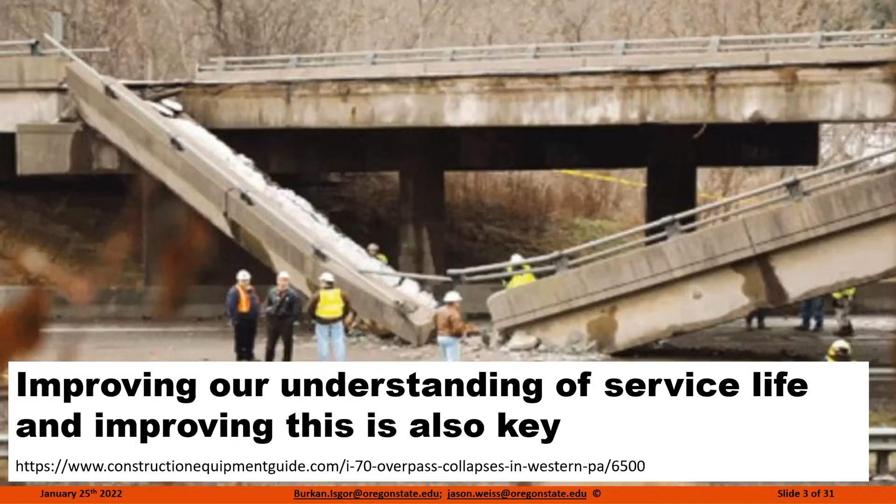So what we're really trying to do here is couple these two concepts together, and bring this to say the time for change is now, in how we're really adopting this or looking at these systems. We really need to look at this as we go here.

We really want to look at our sustainability, but there are really going to be 3 areas we focus on. The first is we have a lot of mixtures where we can reduce the cement content. We can optimize these systems. We can take out a lot of binder in these systems, and we can make them much more sustainable just by optimizing the systems we're looking at.

And I think we know this when we start to look at mixtures that have way too much powder, way too much cement in the system. The second thing we're going to talk a lot about is how we can look at the carbon footprint, and really this cradle to gate phase, by reducing the clinker factors in our concrete. There's a lot of alternative SCMs and a lot of innovative ways we can go about looking at this.

We've got some cellulose additives that we've got a big test site coming up with that allow us to reduce the clinker and get the same overall performance. But in addition, we can actually start to talk about the carbon footprint, where we're looking at cradle to grave phases.

We start to bring in that permeability, the freeze-thaw, and the overall performance criteria for the concrete systems we're looking at. We start to bring in the service life. So what I want to do is really talk about how we're using modeling that's trying to tie these three aspects together as we move this forward.

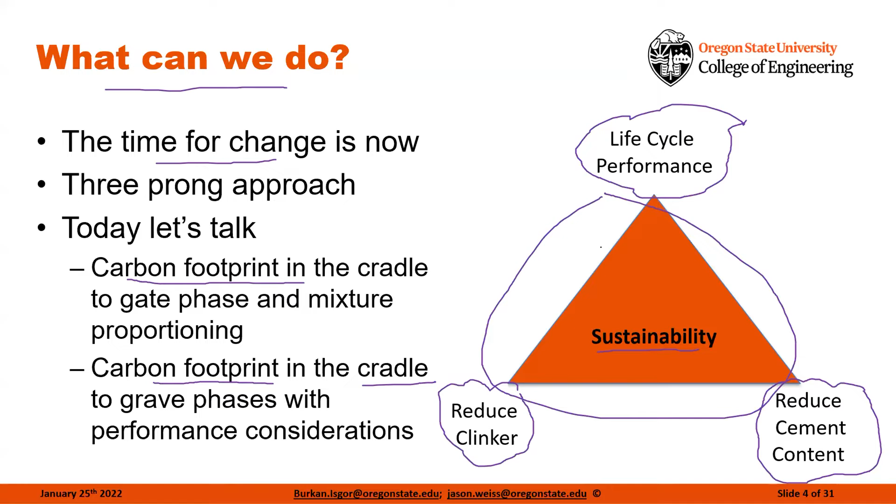When we start to talk about modeling, a lot of times people get nervous and say, why are we using a computer model, or why are we using these other things? I want to point out that there have been models used in concrete for well over a century. We know mathematical models have existed.

We can go back to Feret's model, where he described a model that said we could relate the strength of our concrete to volumes of things like air, water, and cement. We know this became the model of Abrams' water to cement ratio law, which is actually at the heart of a lot of what we do in our codes.

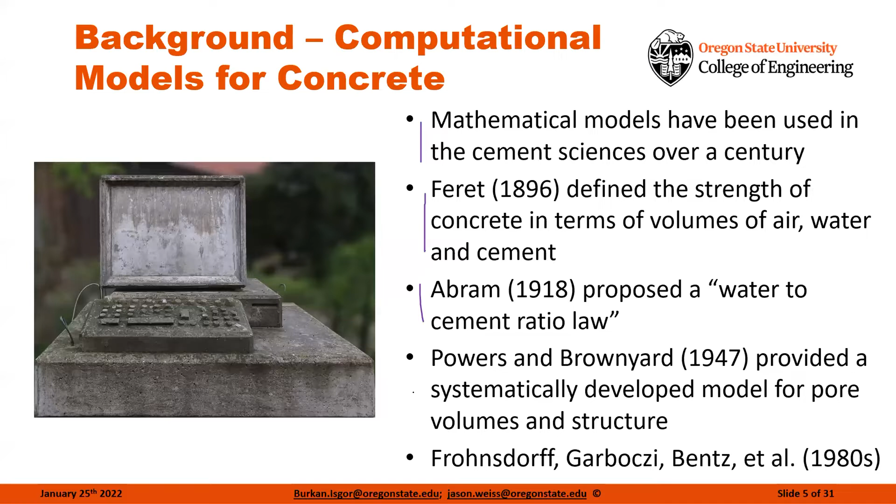Powers and Brownyard, we're going to actually talk about their work, but they were using model systems to describe performance. This has amplified over the years, and we can see this in the NIST model, in the μic model from Switzerland, and a lot of different models that have come along.

What we're doing is essentially saying we're going to utilize some of the concepts in these models so that we can take some of the foundational principles and predict the reactions between cement and supplemental cementitious materials. What we're going to do here that's a little bit unique compared to what we've done historically is we're going to consider the constituent material chemistry and the reaction products, the pore solution and the pore spaces in these calculations.

So for each system we're simulating, we're doing this for the specific materials being tested, for the specific cement being tested, for the specific SCM source being tested. One of the real values we have in this is we've been able to build up a database where we can place all North American cements, and all the fly ash sources being used, so we can now start to simulate a wide range of the materials being used.

The work is largely divided into two parts: a part where we talk about the equilibrium reactions, which is our classic thermodynamics and Gibbs energy minimization, and then we're also going to bring kinetics into the discussion so we can talk about the speed and rate of the reactions. This becomes a very important part of this.

What's crucial in this is that it extends a lot of the work being done in thermodynamics to both concrete, but also to service life modeling and some of the service life modeling concepts.

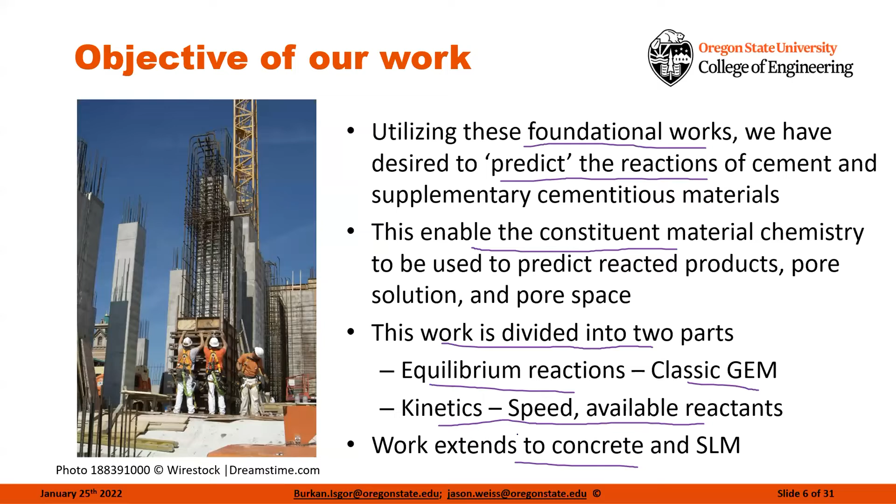So if we take a second and think about this, what we really want to try to do when we're thermodynamically modeling these systems is we start off with our water, we start off with our cement and our cement chemistry, and we bring those together with the volumes of the materials, and we use some of these modeling predictions.

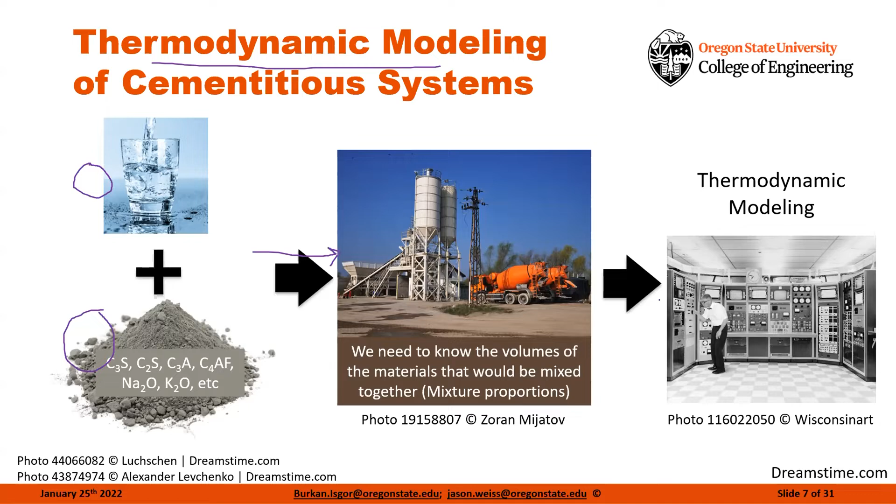Now, what the thermodynamic software is going to be doing in this, or Gibbs energy minimization, is it's going to say, if I start off with a known set of materials, my known cements shown here in the reds and grayish colors, and I start off with water, I can now start to figure out what reactions would form as these materials are enabled to react or come to a state of equilibrium.

And you can think of this a little bit like having a puzzle, a box with all the puzzle pieces in it. So we're starting out with the puzzle pieces, and what we're doing is asking the question, what's the best way to fit all these pieces together? How do we get all the pieces together so that we can get to the lowest energy state? This allows us to determine the reaction products that are forming.

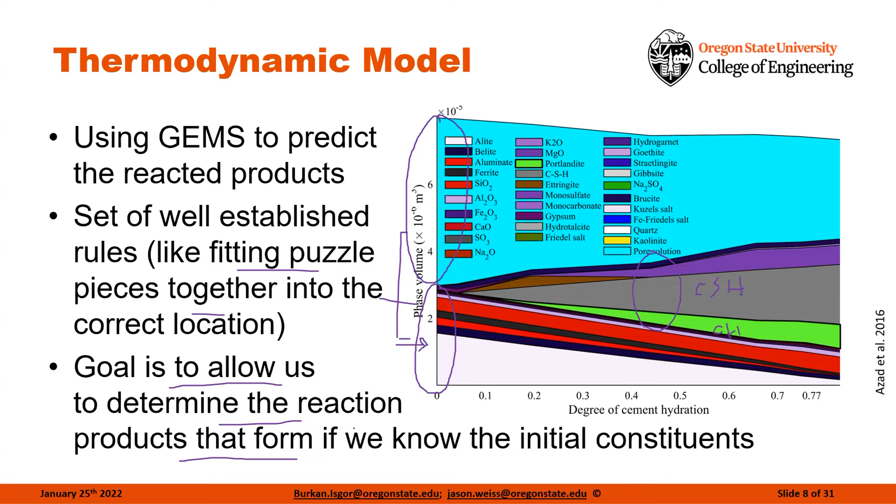We're doing this based on the initial constituents that we have that are unique. So if you have a particular fly ash, a particular ponded ash, a particular specific type of material, we can bring that into the discussion as one of the initial puzzle pieces we're dealing with. Over time, the cement and SCMs are going to react with the water and form phases we know, whether it's calcium silicate hydrate, shown here in gray, or calcium hydroxide, shown here in green. We can calculate how these are going to be produced over time.

The way this is done is through an algorithm inside the program where essentially you take the initial constituents and the water, put those together, and look at all the different reactions that can form from the thermodynamic database. You can pick the lowest energy state, which is essentially saying this is how all those puzzle pieces fit together best. In doing that, we can say these are going to be the reaction products that we get.

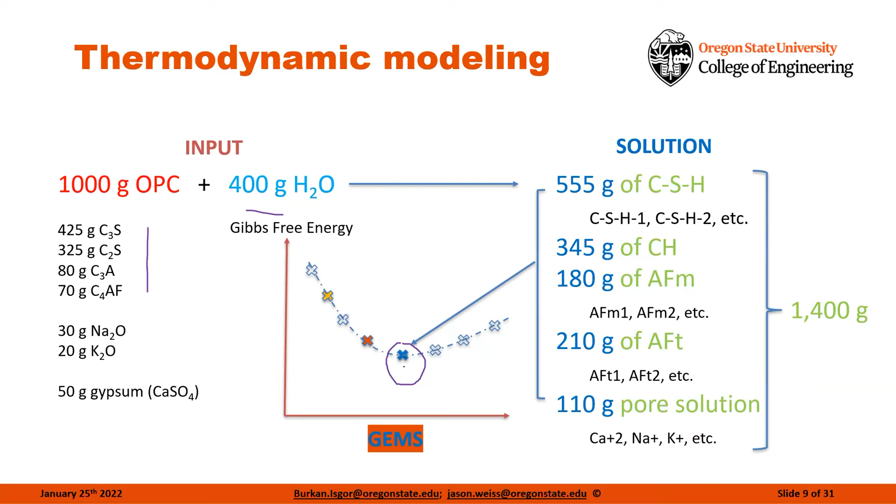Once we have those reaction products, we need to scale that up into what this looks like in terms of the structure of the overall material. So here we're going to start to describe the porosity of the system, because once we take those reaction products and the porosity of the system, we can describe strength, transport, and all these other properties.

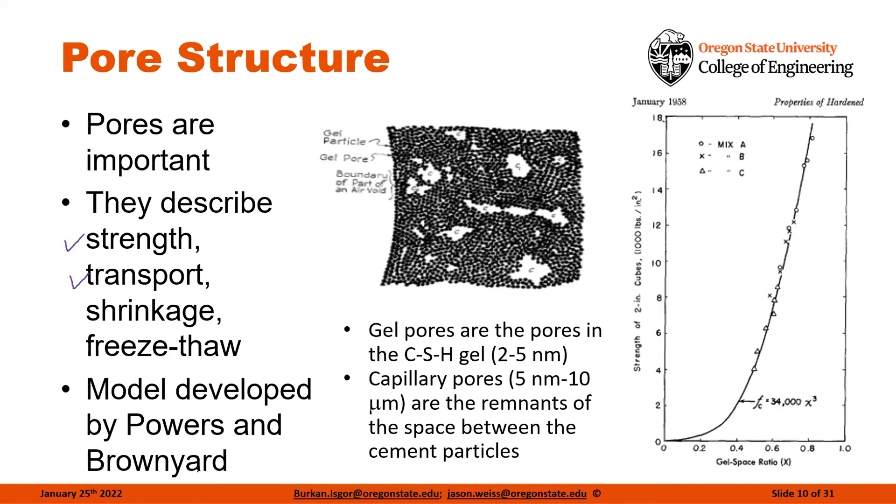This is really the heart of what Powers and Brownyard did, and this is essentially the extension of what we're doing with the thermodynamic modeling. What we're able to do here is apply a model called the pore partitioning model. We take the outputs of the thermodynamic model, where we have the initial cement phases or SCM phases going into the system, and our initial water, and we're able to compute the reacted products.

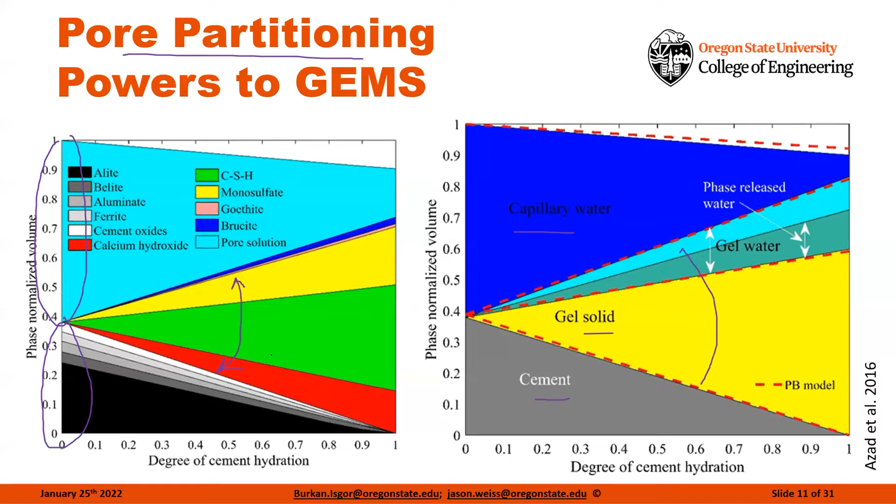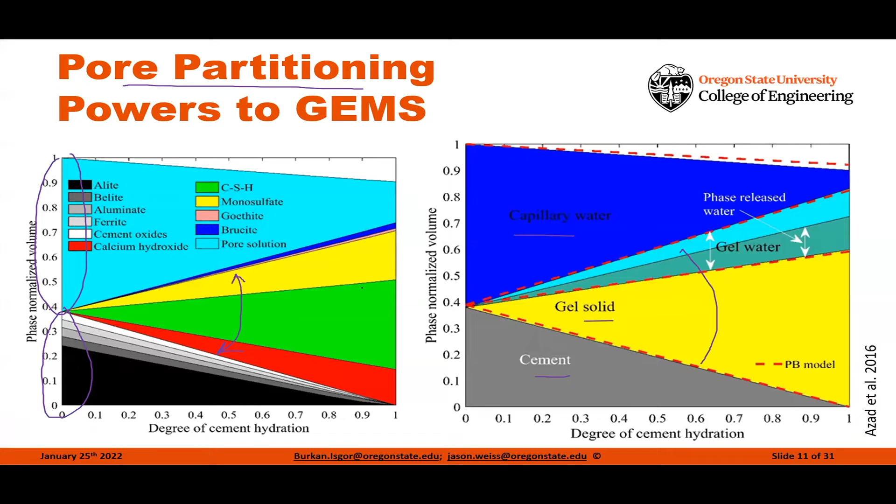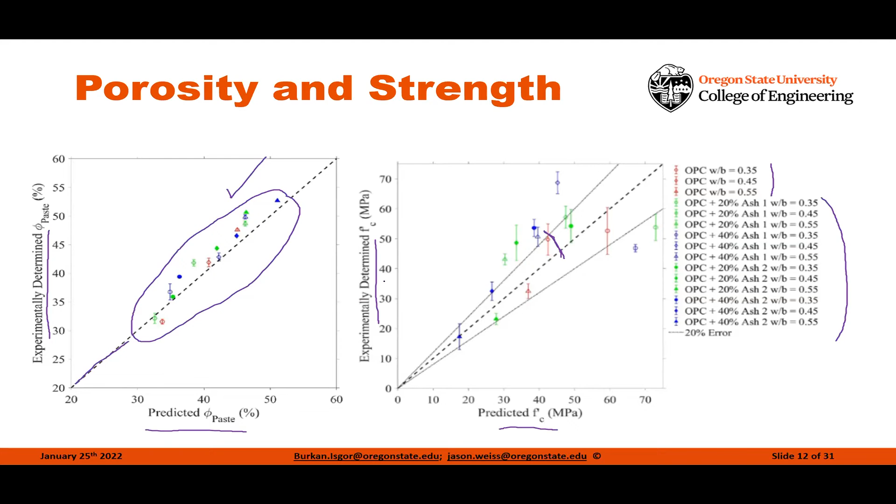In addition, we've used this to describe for a lot of groups how we can make the transition from an ASTM C150 cement over to an ASTM C595, or Portland limestone cement, in the system. We've been able to build on a lot of the work out there, showing how the porosity of the system starts to change, and it's changing because of some of the phases forming in the system.

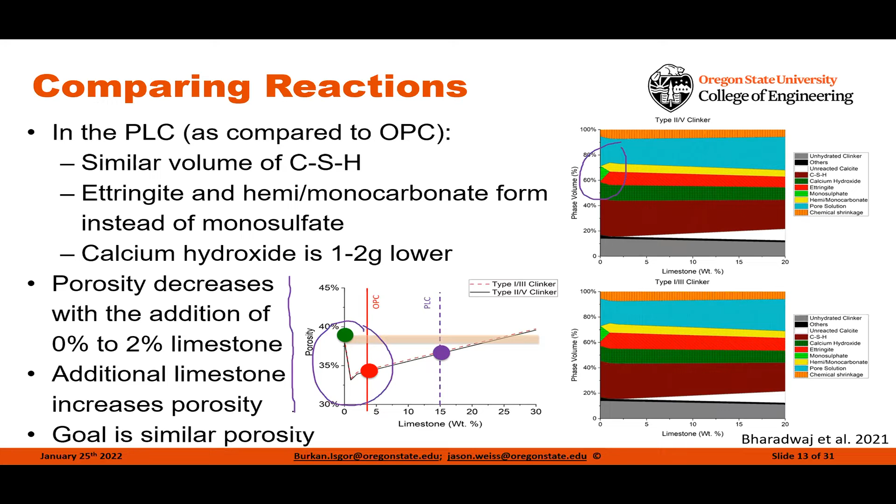We're starting to replace some of the monosulfate with things like ettringite, monocarbonate, or hemicarbonate, and we're able to describe the reductions in porosity occurring in those systems. That reduction in porosity translates into a change in strength or a change in transport properties. This has been very useful in explaining to people what's happening in these PLC systems.

One of the frequently asked questions we've gotten talking with state highway agencies and other groups is: if I use a Portland limestone cement, does that mean I need to stop using SCMs? The simple and most direct answer is no. Keep using your SCMs if you're using a Portland limestone cement. You're going to get a 10 to 12% reduction in carbon simply by shifting from an ASTM C150 cement over to a 595 cement. Right now we believe 49 out of 50 states permit the use of a C595 cement, and we're seeing a lot of transition to this.

What we can say is, if your SCMs are silica based, you're essentially going to see the same type of performance. However, if your SCMs have alumina in them, especially as we increase the amount of reactive alumina in these systems, we see a further decrease in porosity and further stabilization of those phases. That reduction in porosity gets us back to similar performance as we started with, and we're able to go to a much higher limestone content in those systems. This is along the lines of what Karen was talking about earlier with the LC3 cements.

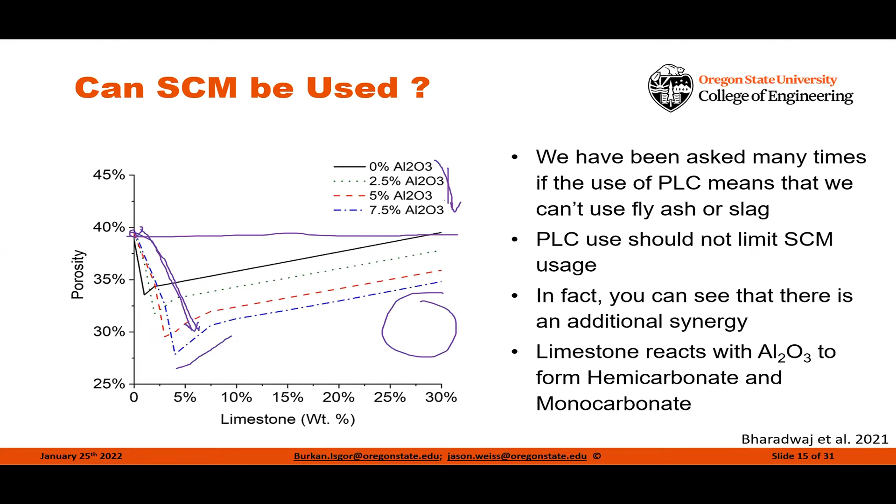So again, just to drive this point home: if you're using a C595 cement or using limestone in the system, it's beneficial to use that with your SCMs, and that's really what we want to be doing as we move this forward. The other thing I want to mention quickly, because this has come up and we've been looking at it quite a bit with these modeling approaches...

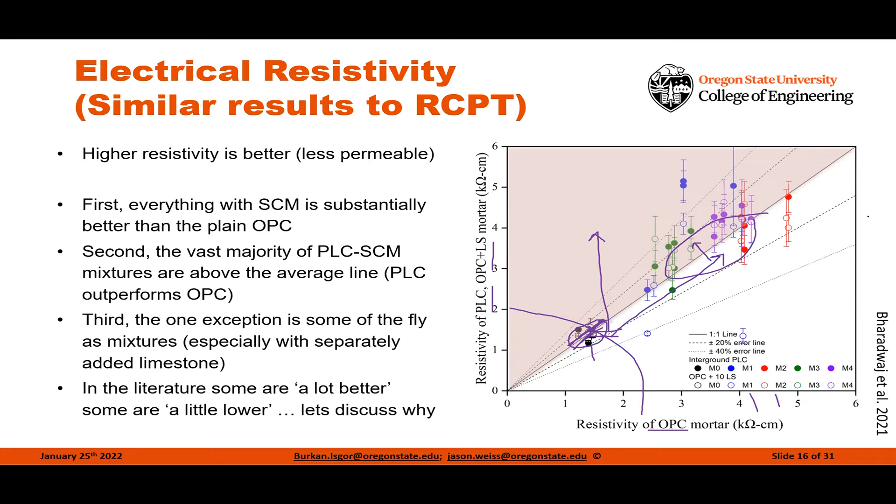So we're actually seeing a huge benefit in terms of transport, a huge benefit in terms of service life, simply because we're using the SCMs and because we're using the SCMs with limestone in the system.

So how do we start to integrate this and bring it all together? The modeling approach we're using is we can take the chemistry of the OPC and bring that into the picture. We have a pretty robust database where we've got all the North American cements we could find placed in the database with that information.

We can actually add limestone into the system if we want. But now we can also add supplementary cementitious materials - this could be fly ash, slag, ground up shells, all sorts of other materials. As long as we know the chemical composition of the SCM and how much of that material is going to react, this simulation can be performed.

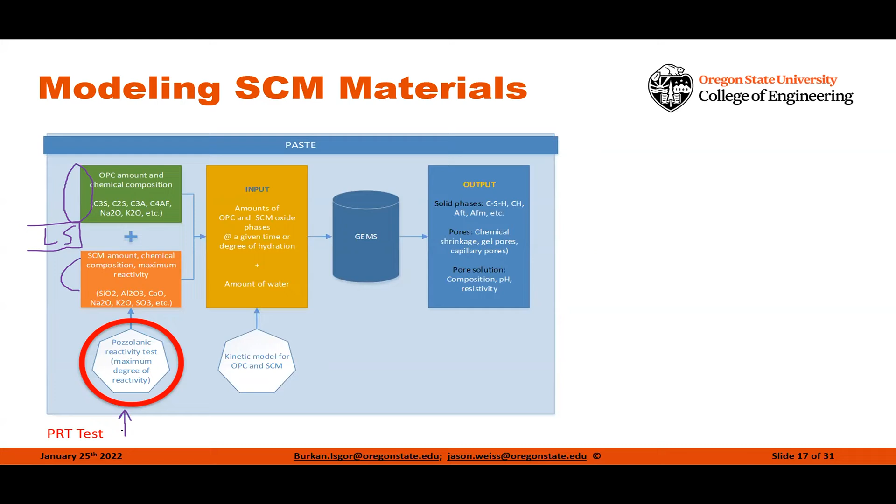So we're performing a very rapid test where we can measure the heat release and the calcium hydroxide consumed to determine how much of this system is available to react. This is modeled after some of the work done by Snellings and Scrivener.

What we've done here is take potassium hydroxide, our SCM or industrial byproduct, and calcium hydroxide, put those together and measure the heat released and the calcium hydroxide consumed. We can plot it on a graph where the calcium hydroxide consumed is on our x-axis.

So the more pozzolanic the material is, the further it is to the right. We can measure the heat that's released by the pozzolanic reaction - the higher it is, the more the reaction is occurring.

For a pure silica system, we can plot out these reactions from 20% reactivity all the way up to 100% reactivity. We can do the exact same thing for alumina. Now, if we start to plot some of these SCMs that we're testing, we can tell you exactly how much of that system is reacting.

So this may be a fly ash with 20% reactivity, or a silica fume that's almost 80% reactive in the system. While we've shown alumina and silica systems here, we can also do the same thing for slags that fall into this category, where we can describe the role calcium plays in that system exactly.

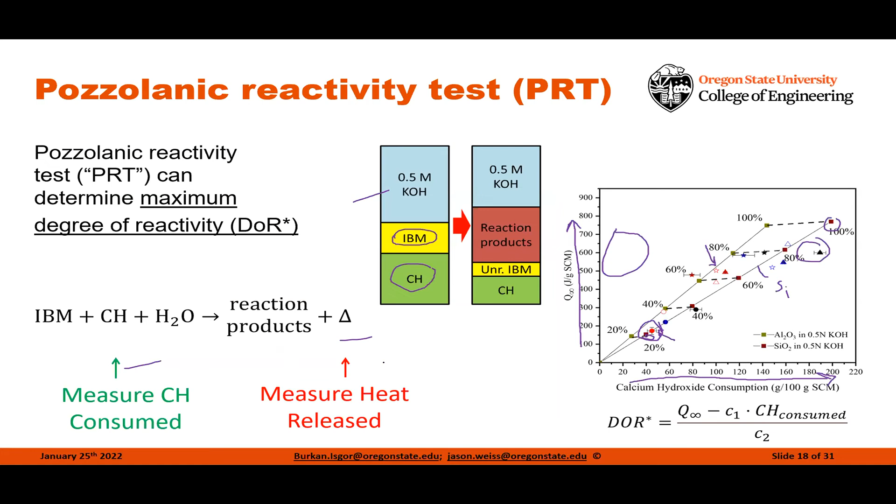So now we can come up with a numerical value for how reactive these different SCMs are. We can start describing these in a way that is, we believe, much more telling than something like a strength activity index, because we're actually measuring the reactivity and it drives the entire modeling of the system. In addition, we're also going to have to bring in some of the kinetic factors.

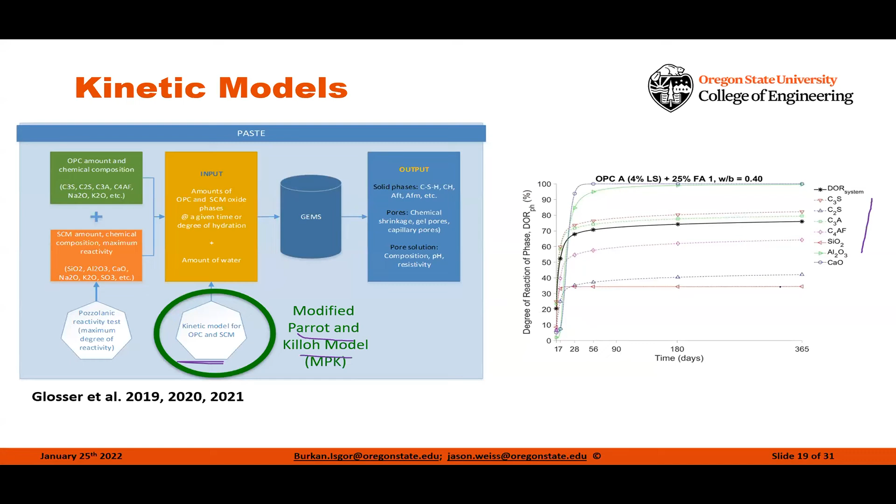In doing this, we've modified the classic Parrot and Killoh model that's been used for cements, and we've added several other systems in to get the reaction kinetics for a lot of the SCMs we're looking at. We can now run this through the thermodynamic modeling and predict the phases, so we can predict how much CSH, calcium hydroxide, and other phases are there. We can predict the chemical shrinkage, the gel porosity, the capillary porosity. All of these things can be predicted.

But in addition, we can also start predicting things like the pore solution, which is going to be important for things like ASR reactivity, the pH of the system. It's going to be important for interpreting electrical resistivity measurements. So we have the ability now to predict these things simply by knowing the initial chemistries of the overall systems we're looking at.

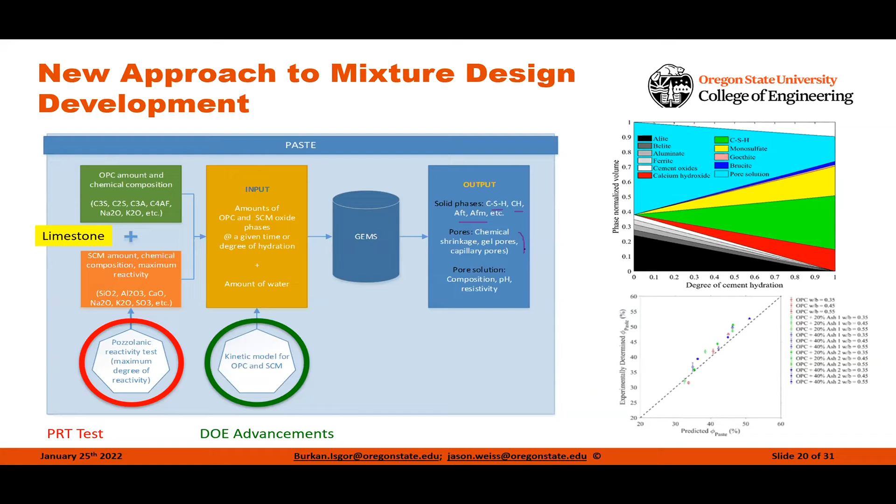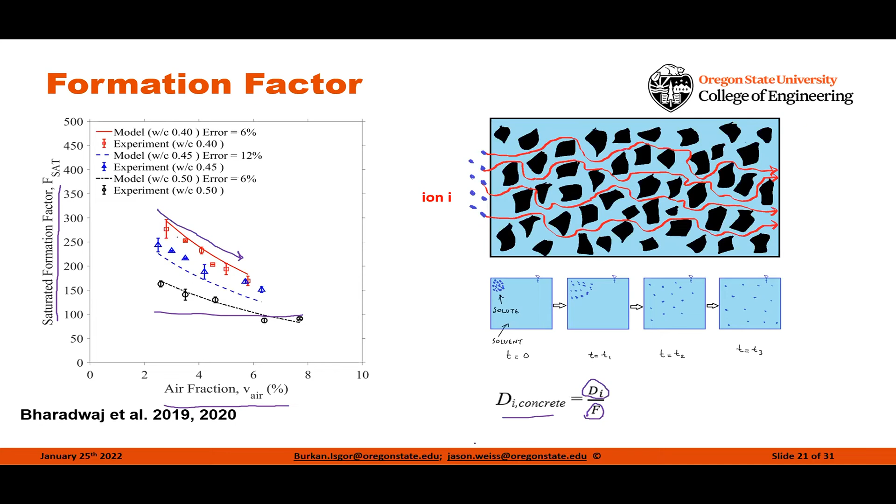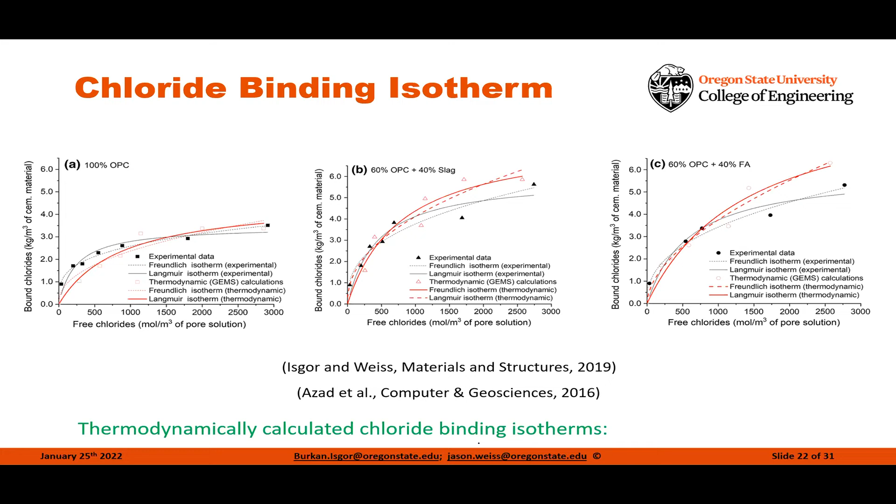When we start to do this, a lot of people say, well, what about the binding of the ions in the overall system? What we're also able to do is use the thermodynamic model. What's shown here in red are the thermodynamic predictions of modeling the binding of chloride ions in these systems compared to the black, which is the experimentally measured systems. What we can see is there's a really strong correlation between simply taking the reacted microstructures and calculating binding and doing the experimental measurements.

So all of a sudden now we have the ability to take this approach and start to build it into a completely reactive transport model where we can capture the formation factor, the pore network, the porosity of the system, and the chloride binding, and predict things like the time to corrosion of a particular element simply by knowing the initial chemistry of the system. We can do the same types of predictions for things like freeze-thaw.

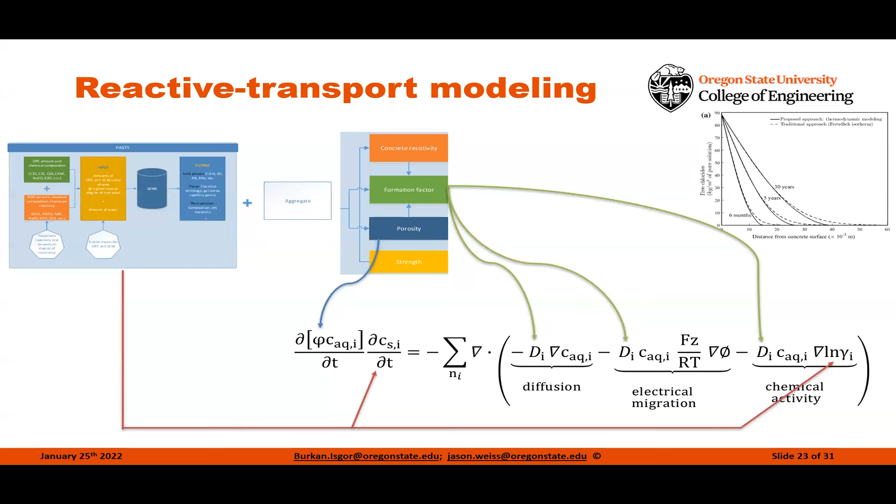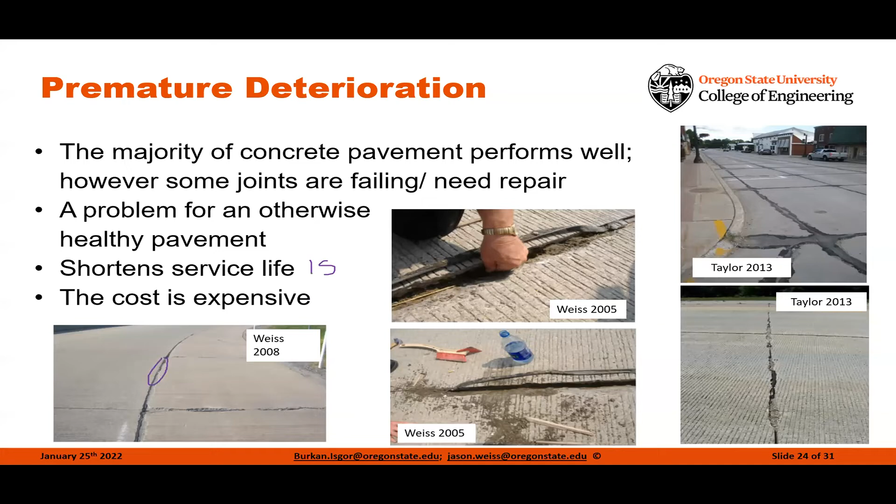I want to show one other example here where one of the major deteriorations happening in concrete pavements is this deterioration happening at these joints in these concrete pavement systems. This shortens the service life of a pavement. We get about 15 years before these joints have to be repaired, as opposed to 40 to 50 to 60 years that most people are seeing. And this is happening because of a chemical reaction.

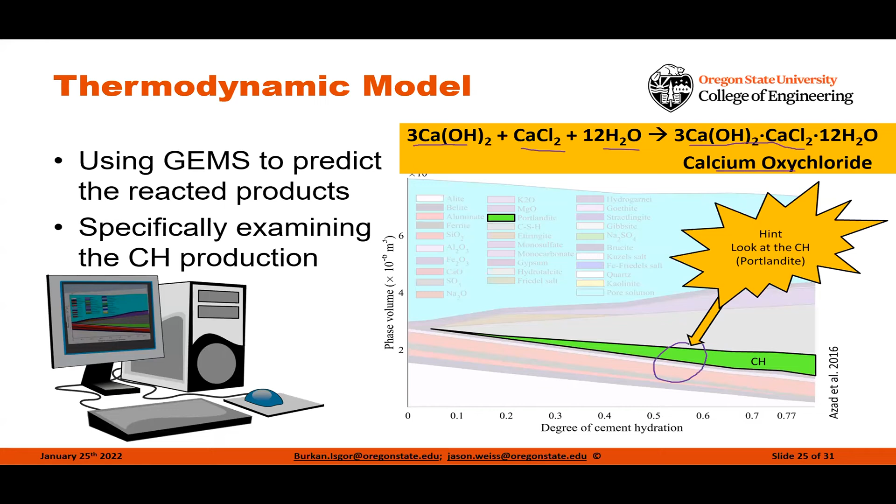So the chemical reaction that's taking place is referred to as calcium oxychloride. It's the calcium hydroxide in the system, plus the deicing salt, plus the water. It forms an expansive agent. This expansive agent expands upon heating. And we can essentially have a really good prediction of this if we simply know how much calcium hydroxide there is in our particular mixture.

Now, what we're able to do is design these mixtures to account for the fact that we can actually dilute the system by replacing a portion of the cement with something else, maybe limestone. We can actually get to this dilution line. But if we also have something that reacts pozzolanically, we can take this further and now predict the amount of calcium hydroxide and the amount of calcium oxychloride that's going to exist inside of that mixture.

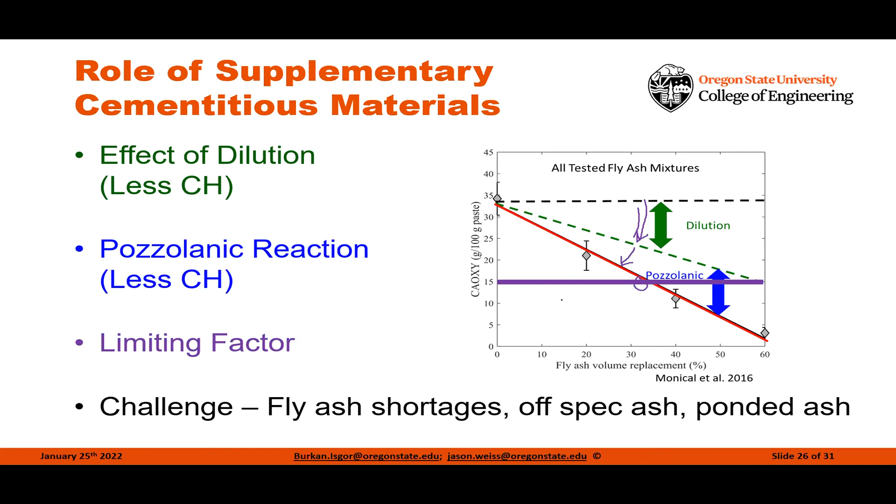So we can start to combine all of these items together and now start to go into a complete design procedure for a concrete. Let's assume we had a Midwestern pavement with no reinforcement. We wanted it to be resistant to calcium oxychloride and freeze-thaw damage. We can now come up with performance criteria or a response to the system where we're essentially setting our criteria for our mixture, saying we want to have a certain strength, we want to have a certain workability.

This is one that we're not predicting right now in the thermodynamic modeling. We want to have a certain transport property, right? We want a certain time to corrosion, and we know what that's going to be if we know our formation factor. We need to have a certain calcium hydroxide content to make it resistant to our deicing salt damage. We may want to specify a pH to help us out with our ASR in this system, and we can have a freeze-thaw time to reach critical saturation.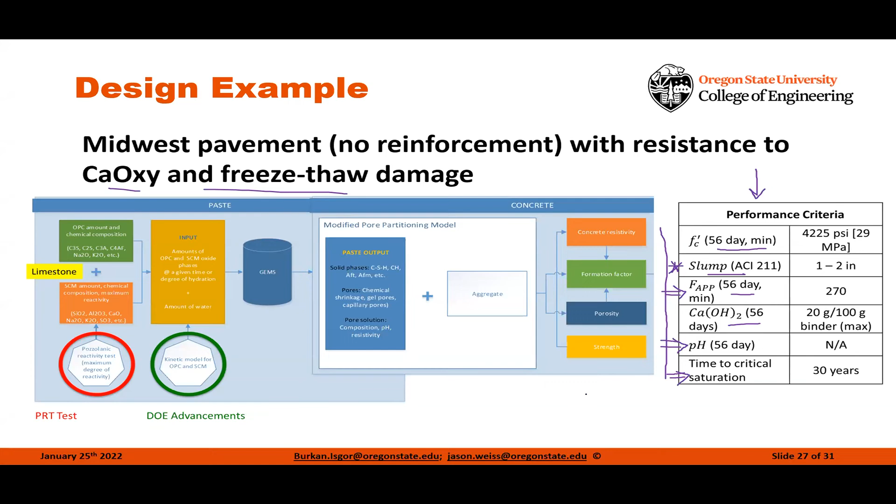We can input all of these as the performance that we're trying to meet with our mixture, and we can then start to come up with predictions simply using the software that can help us look for what the right mixture composition is going to be.

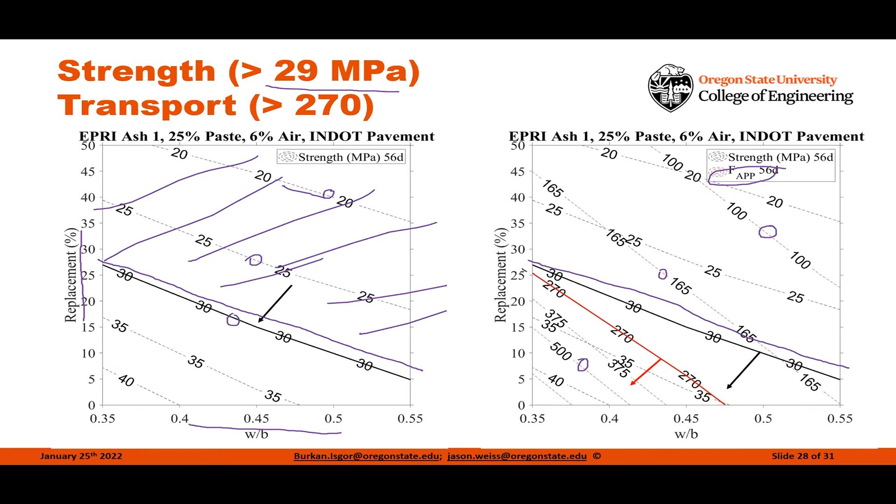Now, would I run out and pave 10 miles simply by using this computer model? No. But would I use this to design where I want to be designing my mixtures for my trial batches? This is a much better way than sort of guessing or doing some of those other things if I'm starting off to try to evaluate and design these new mixtures.

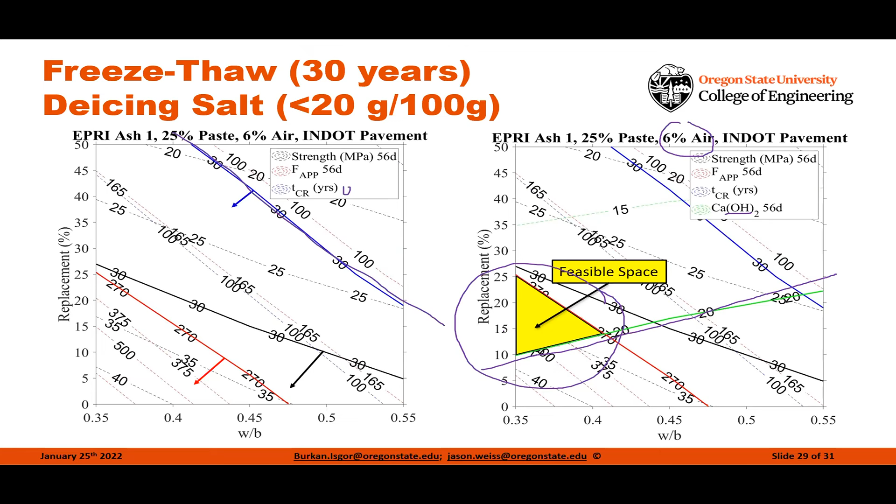We can think a little bit about this like a fish finder. This isn't going to make the fish jump into the boat, but this is going to give you a much better idea of where the fish might be.

So again, a little bit of where we're at with all this, and to summarize, we're really looking at using computational tools to enable us to get a better understanding of how to use alternative SCMs better, and to enable concrete mixture designs to really be elevated. We're no longer using a trial and error approach or an approach based on 1910 technology.

We're considering all the design requirements right at the same time. We're using a Pozzolanic reactivity test. This can quantify the performance of SCMs, giving us a number that describes the SCMs, but it can also be used to drive the thermodynamic model. The mixture proportion approach can be used to optimize the reduction in carbon footprint of the system. The testing can be incredibly beneficial because it can be guided by this approach.

And really help us use our service life. What we've done here is we've got the ability to completely link this with some of the concepts in the CEB model code, or link directly with the tests in AASHTO R101, which is the old PP84 performance specification. So we're now able to predict things that people can directly measure. We're linking the simulation with the prediction with direct measurements, and we think there's huge value there.

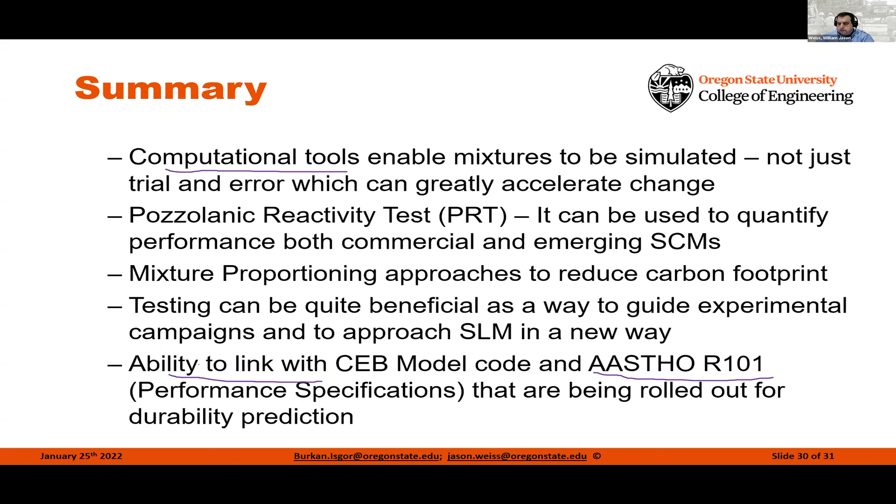I also noticed there's a question on air entrainment. What I'd say is there could be a third axis we draw here, which is the amount of air inside the system. As air content gets smaller, this yellow triangle gets smaller. As air content gets larger, it forms almost a pyramid shape inside those mixtures to account for the role air plays. This allows us to compensate for the fact that when we add air, compressive strength may decrease, but freeze-thaw resistance is beneficial, and we can play those trade-offs in a meaningful and numeric way, as opposed to using rules of thumb.

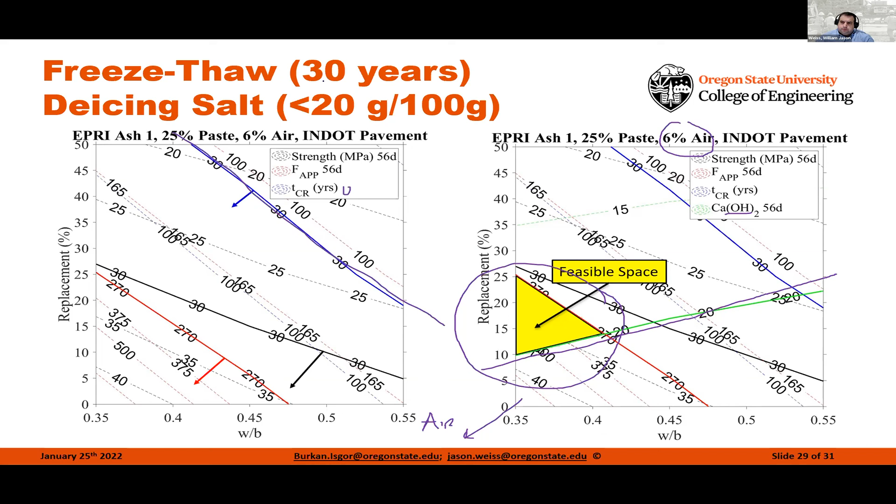Fantastic. Thank you so much, Dr. Jason, for this very good presentation. Thank you so much. Thank you. Thank you for a great conference. Thank you. So now...